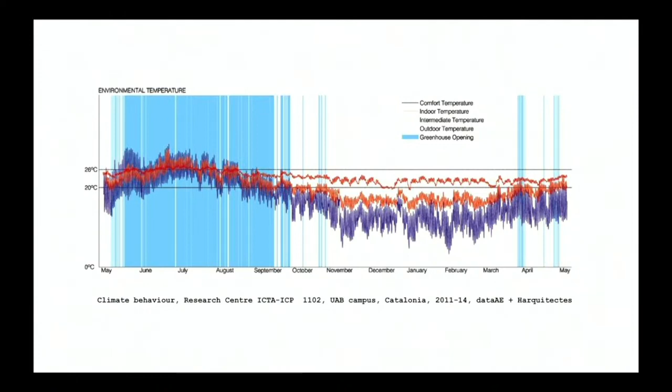The first is these two black lines, describing the legal comfort range, between 20-26 or 21-27 depending on the regulation. The other lines moving up and down are important too. The blue one is the outside temperature, going up in summer and down in winter as usual.

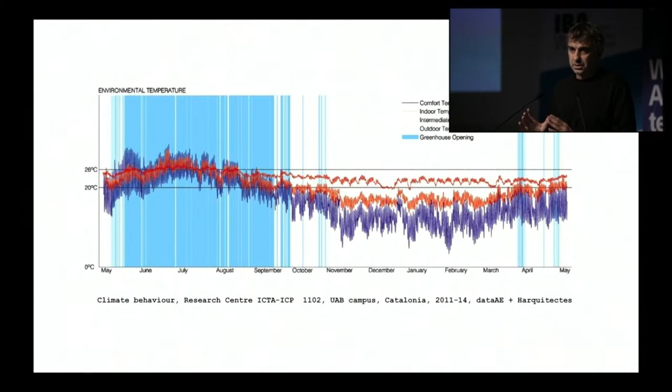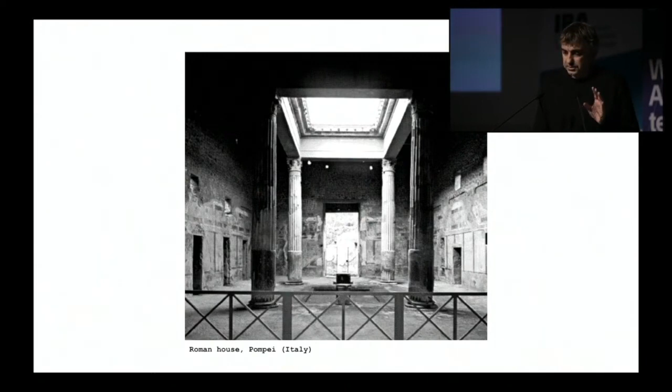It expresses the status of the family that lives there. They also use decorative elements. So it's again about the space, the meaning of space, and the feeling in a space. We really love to create climate comfort, but I think architecture is not only about that. So it's not enough.

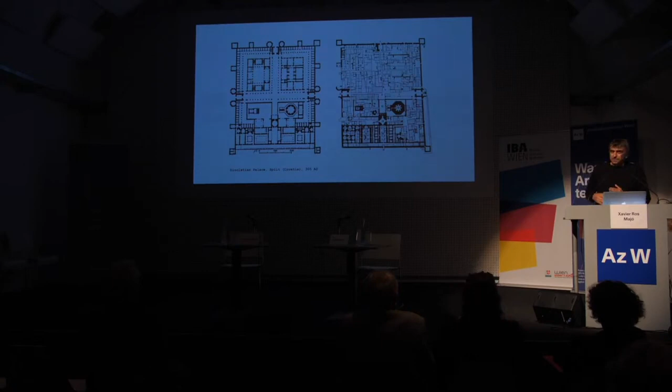Today I visited the Basquiat exhibition in Albertina's museum. Super amazing, and I realized that you can look at one of the paintings, and if you go close, you can imagine what happened during the painting—different layers, some scratches, and a lot of layers involved in the short history of the production of this painting.

I think that in architecture, this could be described in this picture of the Diocletian Palace of Split. There is a starting point—powerful, amazing, very precise in terms of style, kind of building, very homogenic in a way. And then what happened to this palace during centuries?

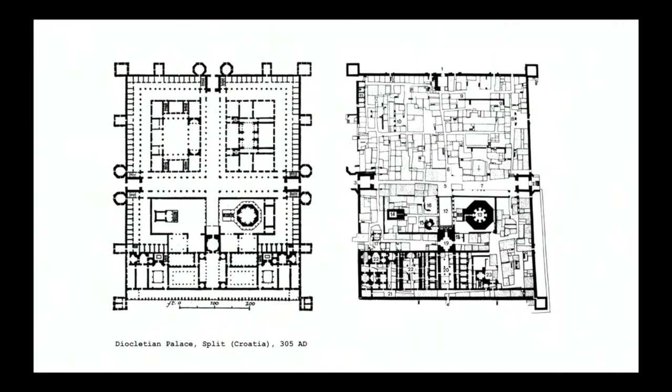Again, it's interesting in terms of history, because to know things is interesting, but not very important, because if you go there nowadays you see these streets, the new buildings that probably have been done using the stones of the demolitions of the original buildings. We don't know why, but some of them are kept and arrive to our days. So it's a kind of collage, this kind of palimpsesto with very different layers, where all of the layers are creating a very specific soul.

Of course, I think the starting point is very relevant, so nothing can be understood or felt without this first step. But after all, it's the mixture of different layers, different constructions, very casual situations that arise and create, in a way, a new thing where all the things that happen, all the centuries, all the scars of the story are kept there, giving a very specific soul to this center of Split.

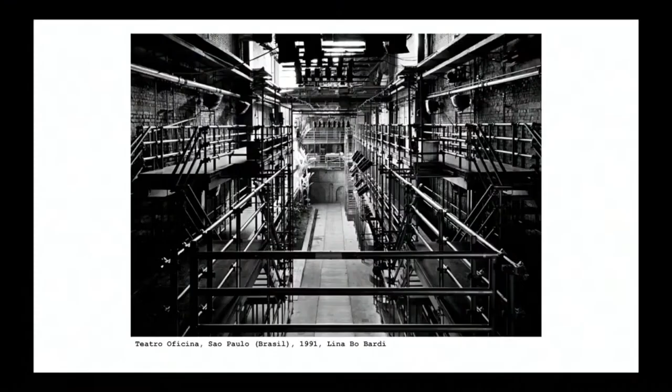And not in a casual way, like the Diocletian Palace, but to work in a pre-existing building—it doesn't matter if it's a heritage building or not. I think sometimes it's interesting to be valiant, it's not a holy thing. So sometimes you need to demolish, to transform, to add. Do whatever is necessary to transform, in this case, burned offices into a new theater, adding this greenhouse facade, the scaffolding, and technical things.

Almost everything is new, but the presence of the old parts—in fact, just the party walls—is essential to understand what is happening there in terms of architecture. It's also interesting, not only this idea of new and old creating actually a new thing, but to understand that a theater, which historically has been an archetype repeated with some variations but with a long life, can be transformed.

Thanks to the architect, in this case Lina Bo Bardi, who understood or imagined that a theater can work as a kind of long street, and it doesn't matter if it's narrow or tall, because the theater that happens there would be shaped by the limits of the architecture in a way. I think this idea of the architect redefining how a theater play could happen is something that's also interesting for us.

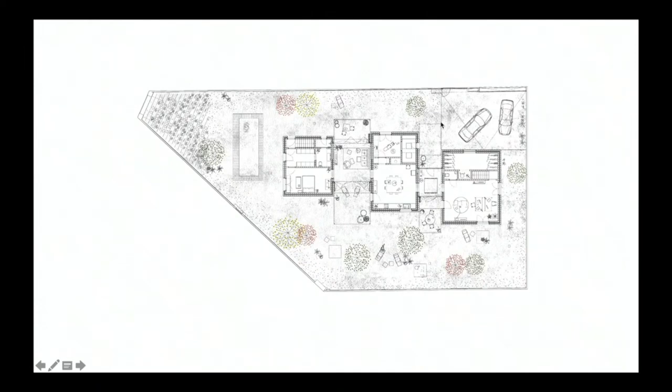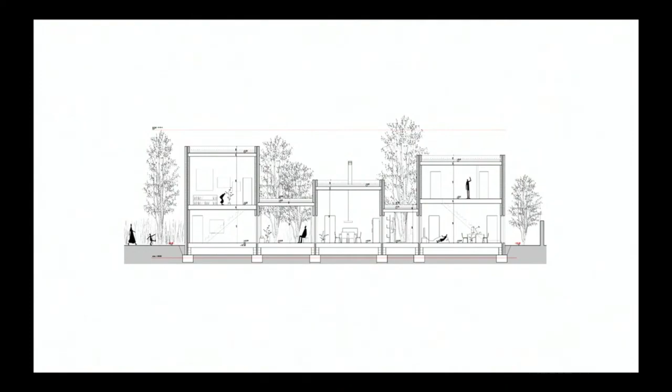You can understand here how simple it is. So the 3 boxes and the 2 galleries or porches connecting the 2 gardens, using a very basic system, load-bearing walls, double walls, because there are no buttresses, so we need them working together thanks to a very basic steel connection, you will see later, and that's all. So it's a very typical system, as you can see here.

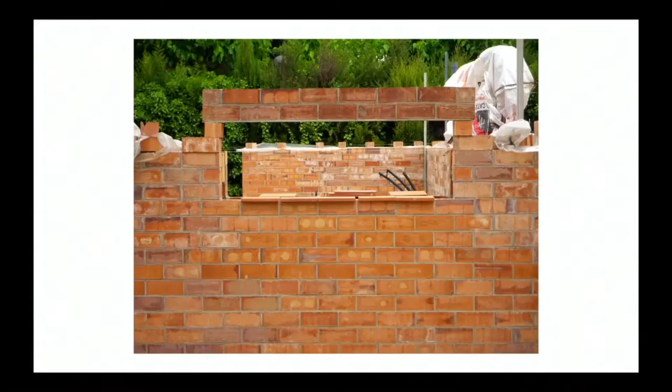These are the connectors, so both of them are load-bearing walls working together. During the construction, we improve everything thanks to the workers. In this case, we changed the design of the lintels because a worker proposed a solution and we loved it, tested it a little bit, and it worked.

The brick is the more basic one, used for structural walls, but in general covered by mortar or different layers, not in this case. And this is the house after completion. You can understand very fast this huge connection and the two boxes, just one window for the kitchen and another for the studio on top.

If you compare this picture just after completion and this one after 3 or 4 years, you can see how the vegetation has grown up. We love the vegetation because it expresses the idea of the passing of time, and it improves not only the aspect of the building, but also the climate comfort. In summer we have foliage on top, and in winter the foliage falls down and the sun goes inside very deep into the house.

In this case we decided to keep the same kind of walls without painting in the galleries, expressing this outdoor condition, this space in between. As you can see here, showing all the basic systems of construction, having a lot of inertia. Inertia is very good in Barcelona. And then inside the boxes, the same structure, the same walls painted white, with just one or two windows per space. And the kitchen, which is very high.

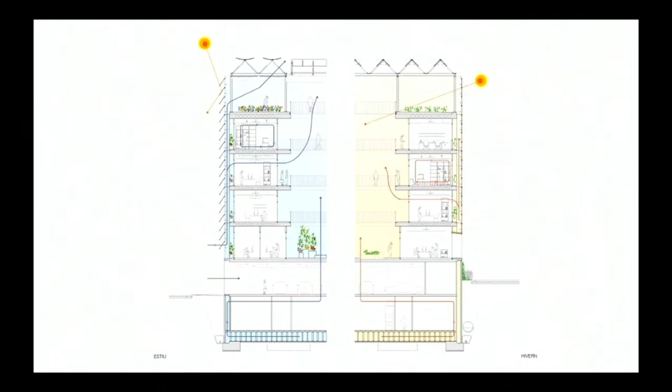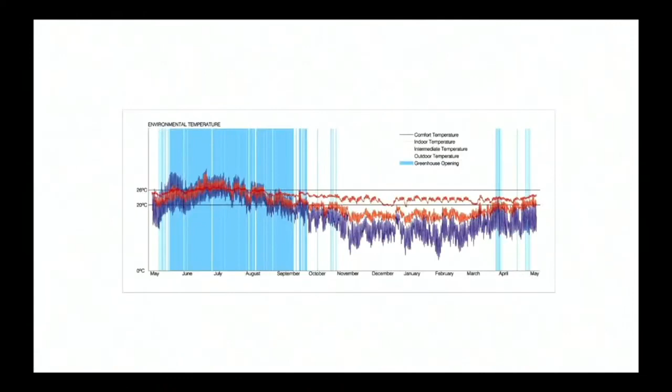The building is very simple, so we have a heavy structure, post-stressed concrete framework with these columns. We have 4 atriums, vertical patios that connect all the levels and of course work as a kind of chimney. We have these rows of offices made of wood. And then all these spaces that are made for working in a less formal way are scattered throughout the building. Then we have the skin with these

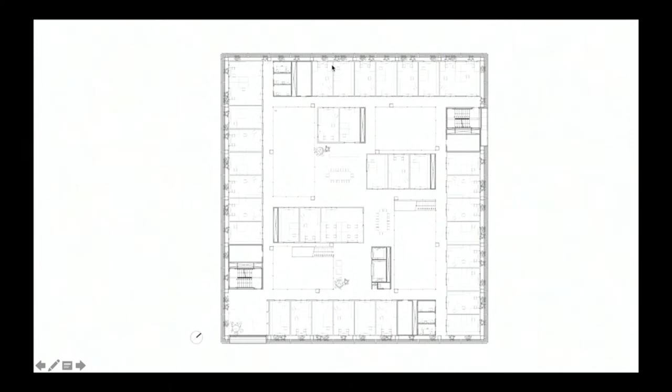polycarbonate windows that can be open or closed. And the thing is that the building works, as I said, as an organism, because in winter it's closed and in summer it's super open. So we have a lot of air crossing the building, and it works very well.

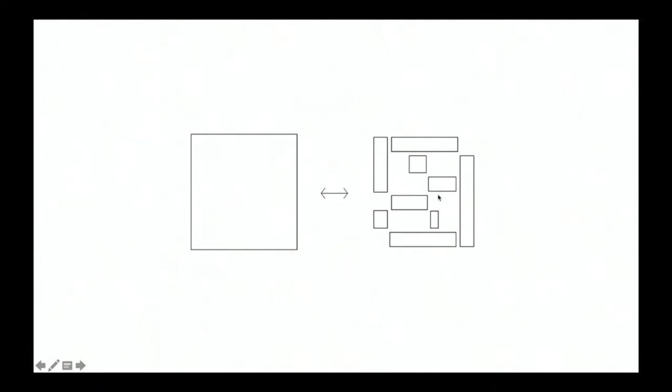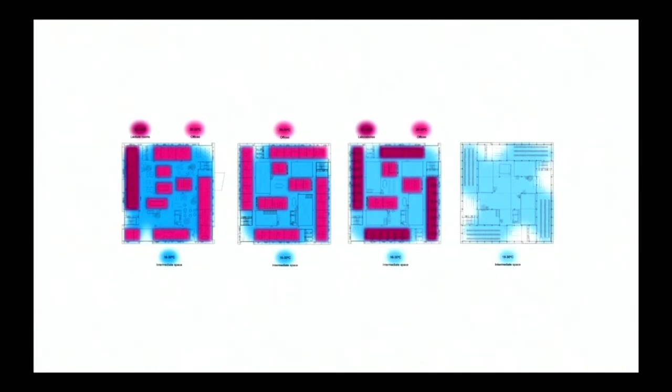You can see here in blue everything that is not artificially climatized. So almost all of the building is done with this strategy, and the rest, in pink, is for the offices and the laboratories, which have a high standard of comfort level, so it's a closed system. The rest of the building is interchanging always.

And again, in this case, this is the space where the ambition in terms of climate is low. So you need to wear shorts in summer and more layers in winter, but it's the only way.

So it's controlled by a computer system. Of course, the user can decide if he wants to open the window, but if he gets out and the window is open and the system decided it must be closed, it gets closed. So it's a mixture.

And yeah, it's very complex, the building, but the slab, we make it lighter using these pipes where the air crosses the whole building. So when the air is cold, it refreshes, and when the air is warm, it dissipates the energy thanks to the concrete mass. So it works very well.

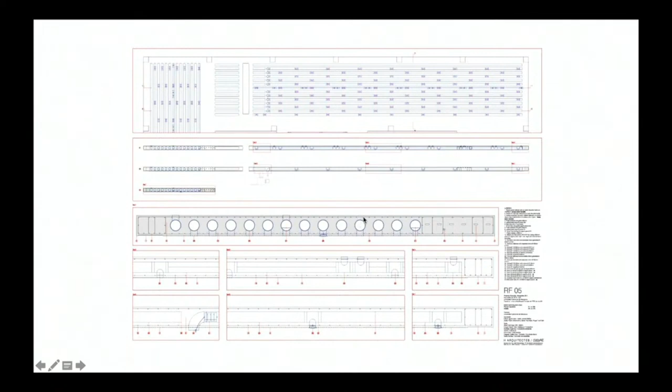And we have a refreshing pipe system on the bottom, and then with the pavement, we have a layer of pipes to get warm. And this is the construction. So it's very complex and beautiful, the picture.

But to reduce this half part means, I think, that year, 100,000 euros, which is a lot. And today the energy, it's very high. This was 7 years ago.

Fluid matter, yeah, as architects we design in general not the fluid matter, but the solid one. But what we decide about the solid affects totally the fluid matter. It means the air, the water, and so on.

So in this case, this is a civic center, or kind of civic center in Barcelona. We create a kind of big tool to improve the temperature. So the whole building, it's a tool to create comfort in a natural way.

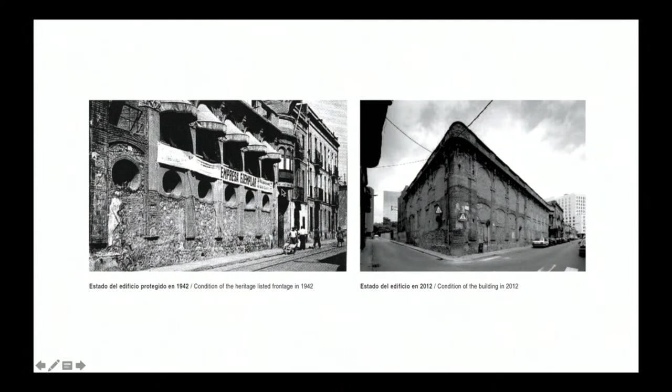This was a former, a big glasswork factory from Barcelona, close to Diagonal. But they demolished almost everything, and nowadays, when we won the competition, I think that the factory was very, very big.

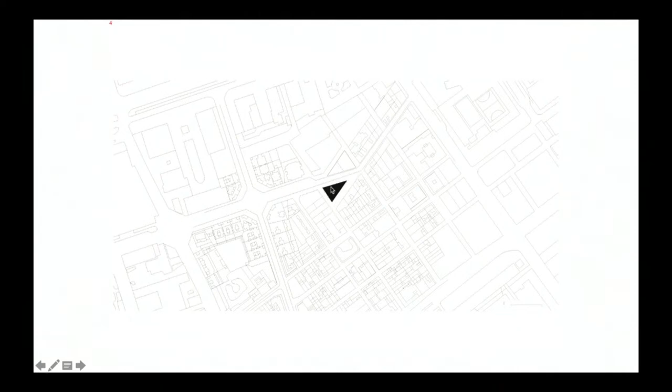But what arrived to our days is just this triangle, and not the triangle, but the single facade, this L. And the rest is just the structure to support the facade, and that's all. So we had to demolish all the structure and keep the facade, because it was a heritage facade.

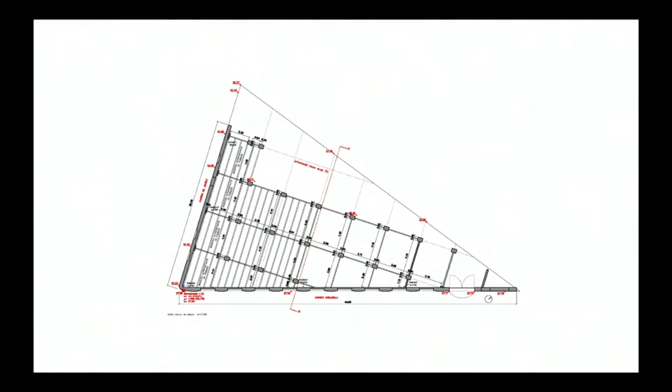So we had kind of conflicts with the patrimonial and heritage people, because, well, it's not an excuse, but sometimes you need to convince people that are not easy to convince.

Now the thing is that we started the project with these big walls that we have here, and we implemented the same kind of walls to the whole building to create a new structure. The geometry is very strange.

It's a triangle, and we decided to put a kind of greenhouse in the sunny facade, and then the classrooms facing this greenhouse, and then you will see with these big gaps on the wall that there's a connection with the chimneys, and then a corridor, and then the small program where the triangle gets smaller. And then another atrium, a very vertical one, that is the entrance. So using load-bearing walls and massive concrete slabs to have inertia.

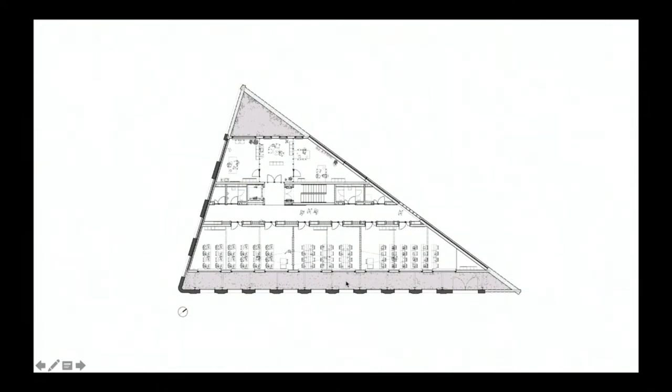So you can see here one of these classrooms during the construction. So we have this window here connected to the greenhouse, and these gaps on the wall connected to the chimneys. So the air crosses from the greenhouse to the gap and goes up.

Thanks to the chimneys. So it's a very risky project, because we decided to renovate the maximum times per hour. It means 11 times per hour, which is the maximum, using only a natural system. And in fact, using the sun during the summer, which is the enemy in Barcelona.

These chimneys on the top create a very specific landscape in the city, but they are tools that remove the air very fast. The air crosses the classroom, goes up through these pipes, and in the base of these pyramid-shaped chimneys, the temperature gets very high, 70 to 90 degrees. That difference of temperature creates the movement.

And it happens because of the sun. The geometry of the pyramids is the best to get more sunrays during the whole day. So it's not about aesthetics—it has an aesthetic consequence, but it's a very scientific design in a way.

It's important to remove the air during the day, and we have an extra tool to refresh, which is the pavement. We have pipes with fresh water, but not much, for if necessary, and also in winter.

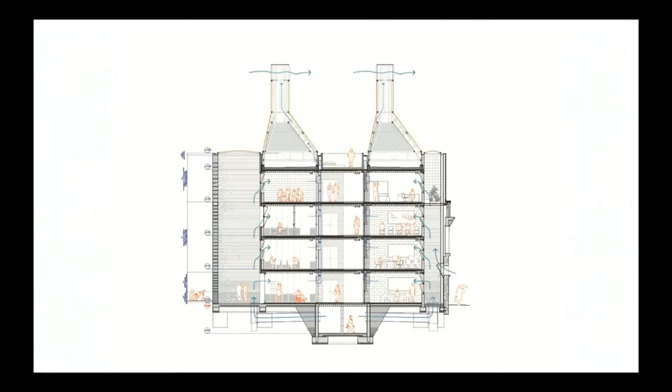What is important here in Barcelona is not to remove the air during the day, because the temperature is so high. It's to remove the air during the night, because at night it goes down enough to refresh the whole building. Refreshing the mass is the secret—using inertia to create comfort.

So the chimneys work also during the night with a very basic system you will know—the Venturi effect. Thanks to the changes in size of the gaps, the air goes faster and is removed, sucking the air from the bottom. It's very simple—that's the strategy.

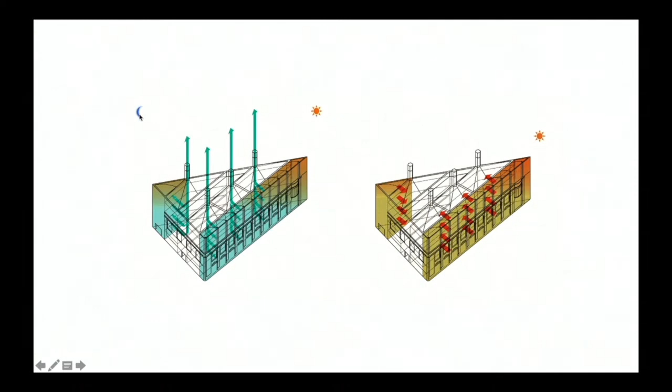In winter, everything is closed, just to renovate the air. We circulate it maybe once per hour, depending on the people in the classroom. In summer, it's always open during the day and also during the night—same strategy.

We manage these schemes and simulations using engineering software. We don't know how to use it, but we make all the decisions. We put options on the table, they study and improve them, we discuss—we're at the same table and level, but we make decisions because it's architecture and we are architects.

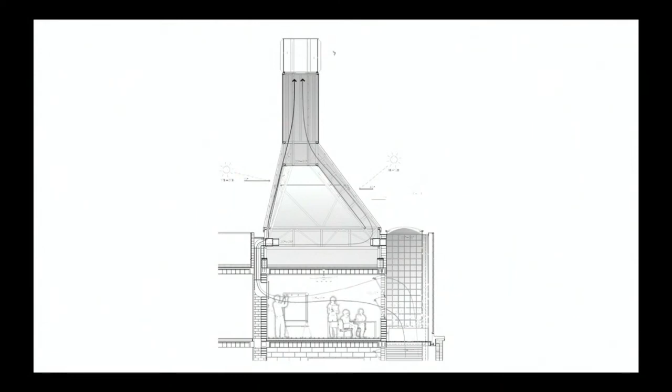We do this kind of drawings for El Croquis magazine where we express, or try to express, everything related to architecture—space, structure, proportions, air flowing, temperature, everything—but focusing mainly on the people, because people are our target.

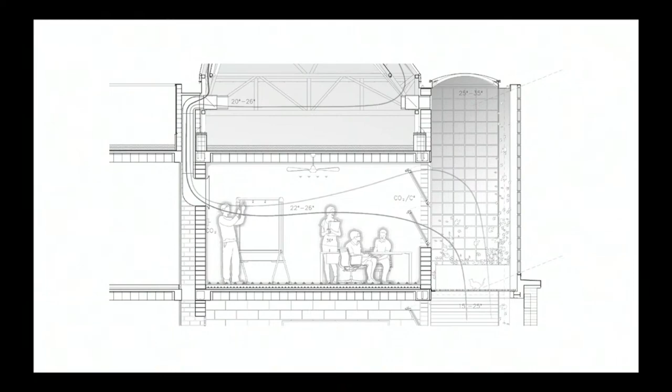Architecture is not an excuse, because it's more than that—everything is decided around the experience of the people, and experience means all: space experience, skin experience, feeling, temperature. So we actually believe in a kind of global atmosphere where everything is involved.

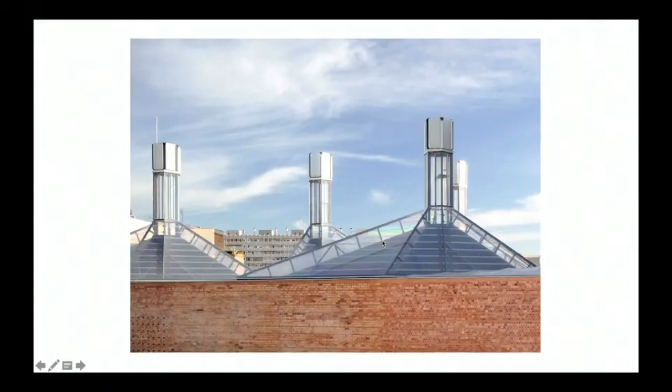As I said, we have a heritage facade here, and we increase the height of the building and the chimneys. For us it's important that we started from an old facade and created a new one using the old, so everything is new here. You cannot understand what is happening without feeling the important things of the old part, but they are working together in all ways.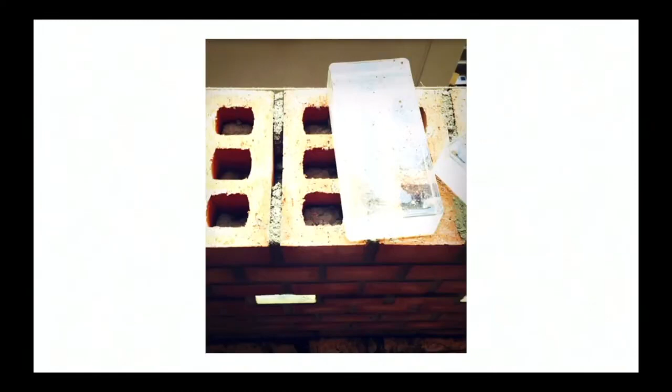This is the entrance—you can see these black dots that are white dots inside because they are made of glass. It's a kind of remembrance of the glass factory. Sometimes we are sensible, but not much—it was the case here; we have feelings.

I told you something about using Lina Bo Bardi's Teatro Oficina—it's important for us, this idea. For us, working with heritage or non-heritage buildings, just a pre-existence, is always an opportunity to transform, because we need to give new life to the building, so we need to be valiant to make good decisions.

This is also a civic center in Sants, Barcelona. This is what we found there—it was a former cooperative from the start of the last century, 1928, I mean.

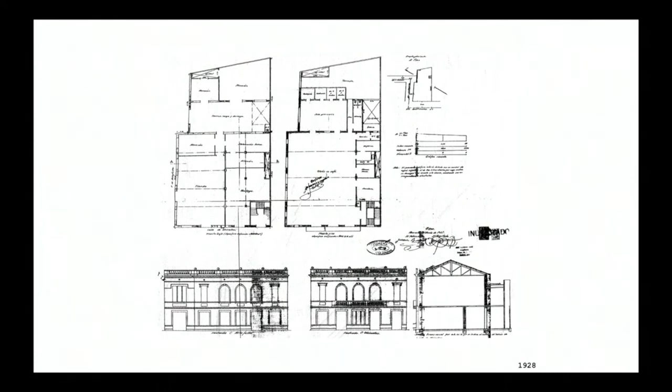We arrived there in 2012, I guess. The building was divided in 3 parts: the main, more public one, and these two rest parts. Our strategy was to create a kind of new street where users can quickly be oriented inside the building to know where to go, because it's a center used by very different people, new users and common users. So it was important to make a clear decision, to create this street thanks to a demolition, a total demolition.

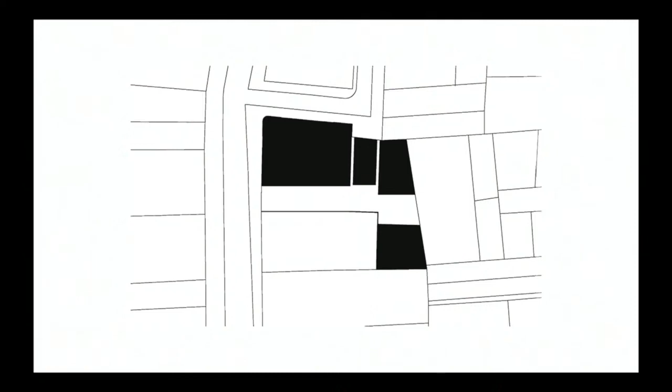You can see here that we proposed this demolition, and we also added a very strategic element inspired by Teatro Oficina of Lina Bo Bardi, kind of a scaffolding, where every person can recognize where to go. The stairs and this kind of passerelles, everything very fast and very easy.

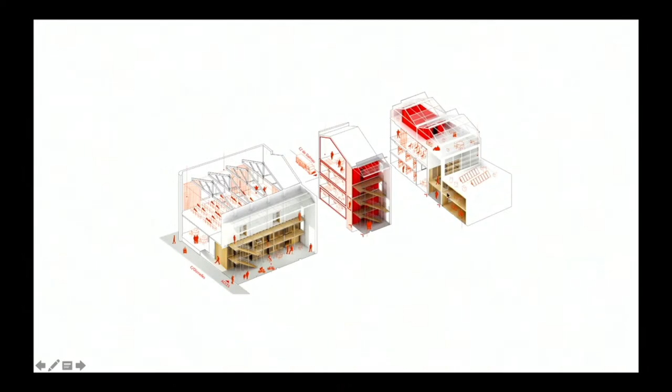Then we have the new theater, the former shop converted into a kind of multi-purpose room, a services area, and a lot of classrooms here on the bottom, the inner part. So it's not very interesting, let's say, the plan of this building, because it's very rare. But it's interesting to understand that in black you can see the original structure, the original walls, better built in the more public area, with worse systems in the rest of the building.

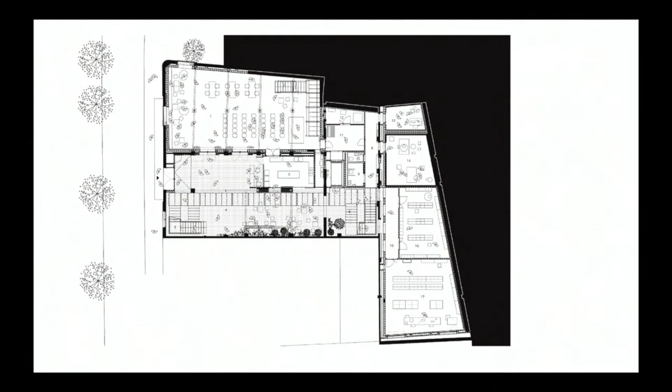So after all, we demolished almost everything in that part, but here we just reinforced the original elements, columns and walls. So everything here is almost old, and everything here is almost new. But also in this part, where the structure is totally new, you can recognize the original elements that create a very special atmosphere effect. You can recognize this street, the different pieces, so not very interesting in terms of plan—this is the main strategy: to transform and recover the theater and the former shop, and demolish the rest.

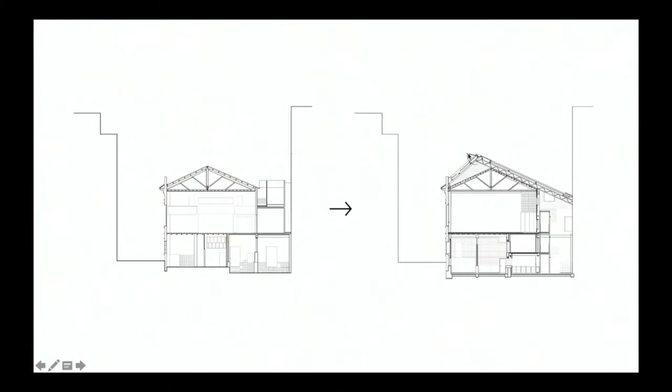As in the Chimneys building, the roof becomes more simple, but still a chimney. So we have an air chamber here, and the air crosses the whole atrium and goes up thanks to this window. You can see here again the original facade and the new things, but working together as a totally new building.

Again, the strategy is the same, trying to understand where we don't need artificial climate. In this case, we need artificial climate in a lot of classrooms and so on, but the air we push inside the classrooms goes outside and is removed in this street. So we improve the temperature here thanks to the artificial systems that we have in the inner parts.

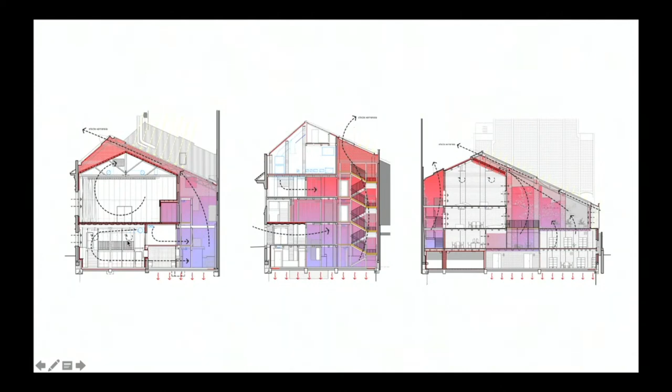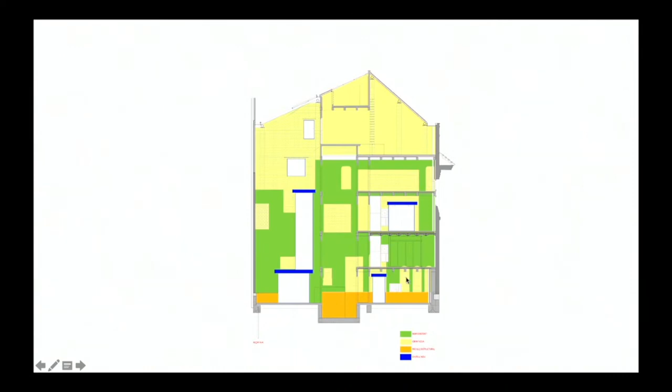If you look at this moment with these three windows, new door, green wall as original, and the new one in yellow, and this plinth that you can see here, the old, the new, the plinth, everything is working to support the slab. It doesn't matter if it's new or old, it's the same, it's a wall, it's a load-bearing wall. This is for a structural strategy, but it creates a very specific aesthetic effect.

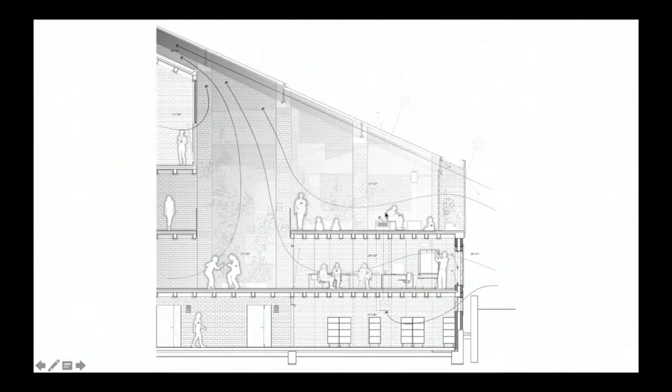This is one of the main spaces of this project, where you can see the drawing, the people, the air, the systems, the temperature, everything described in the picture. The truth is this is the new part, but thanks to these big gaps, it's not possible to understand the building as something new. Trying to keep the spirit of the original building was something important for us.

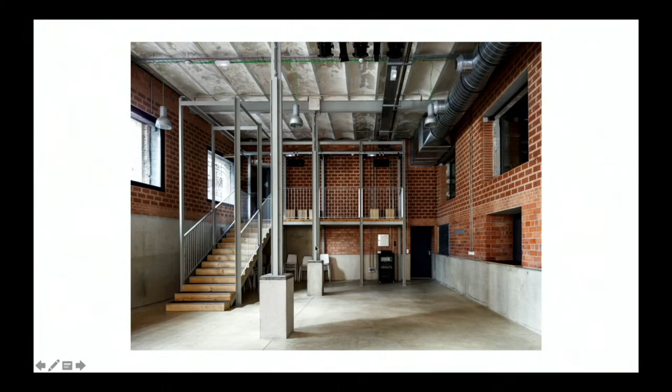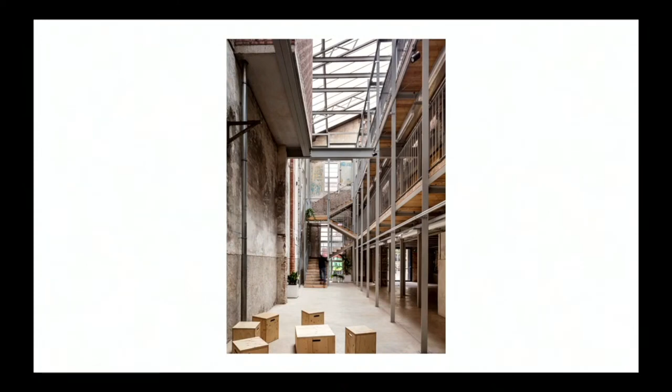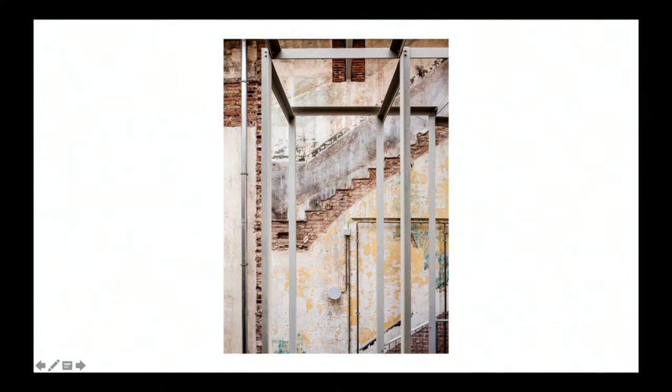This is the atrium. There's the entrance, the original party wall, and the new scaffolding with the passerelles and stairs, so it's very easy to understand how the building is organized. These scars and cracks and all the process of demolition are kept there, creating a very special atmosphere, mixed with new structure, new bricks, and the scaffolding structure of the stairs, and also all the systems for light and so on. So everything is new, but nothing could be understood without the old parts.

I will not explain every brick, but every brick has an explanation, because it's a good way for us to make decisions, to give reasons why we use less height to connect with the irregular skyline of the original wall, why we use the cheapest brick for the structural wall, why we use this U filled with more concrete and steel bars, etc. There's always a reason why we use the size, which is the Catalan size, quite bigger than the Spanish one that we use for the new structure.

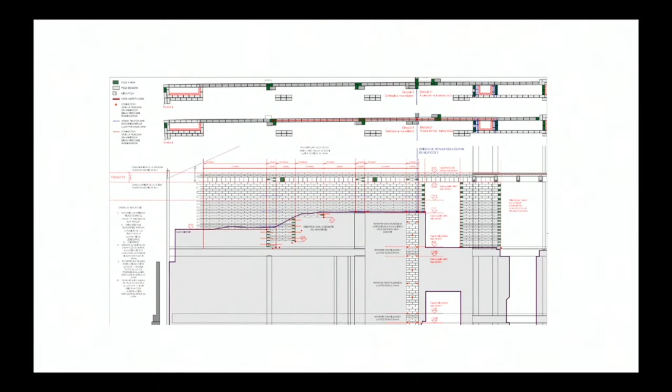So these are the kind of plans that we did for this project. I think we did 250 plans for the project before construction, and 350 more plans during the construction.

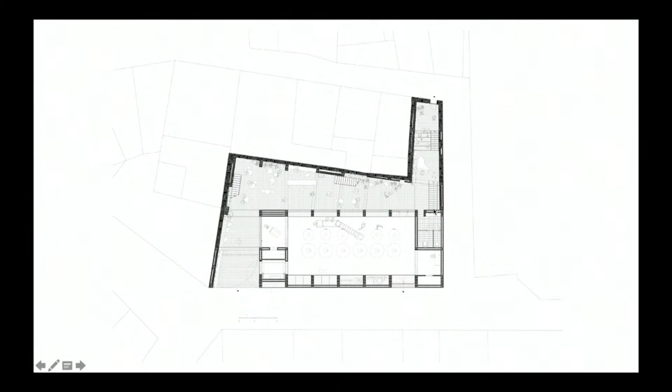Very fast, because I decided to keep this project since it's a new one - the idea of total space, which I explained a lot about. This idea that everything is involved in the space. In this case, for this project, which is a winery in the south of Catalonia, a very special area called El Priorat, a wine region - the project is very simple. We have the hall to create the wine here, and then there's a kind of street, a corridor surrounding this box, a very specialized box, a kind of cathedral for wine, and that's all.

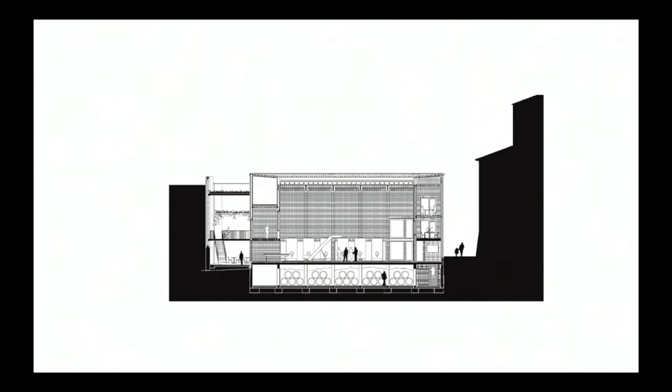So we have the wine production here. We have very high demands in terms of regular temperature, so it's very important to have very little variation of temperature during the year. This is the section for this kind of street where everything is open, just roofed, and that's all. The ambition here was to create this total space, a kind of super height, because the air increases in temperature here and goes up, then is refreshed and goes down thanks to these chambers between the walls.

You will see later a very simple system with more layers in the south with the sun and fewer layers in the north, and it works very well. After two or three years, the temperature is very regular. The tanks have a kind of serpentine to change the temperature artificially, and it's mandatory - there's no other way to make wine.

It was not necessary to have very regular temperature because we have machines, but if you create a good atmosphere, a good temperature, you don't need to use a lot of energy to create artificial temperature in the serpentines that surround the tank.

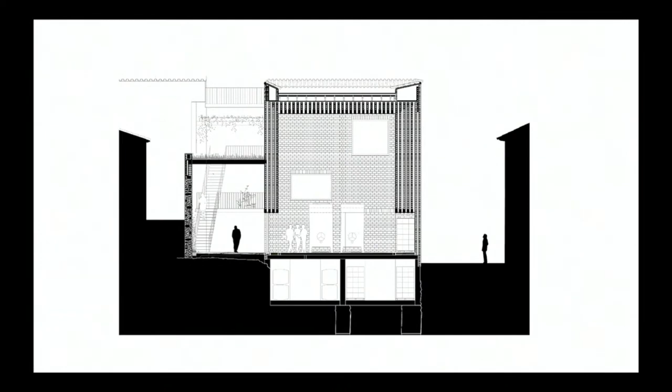It happened, really. The system is very simple, always the same: hot air goes up, and when it's refreshed, it goes down. In this case, using a layer of water - it's a complex system, but easy to understand.

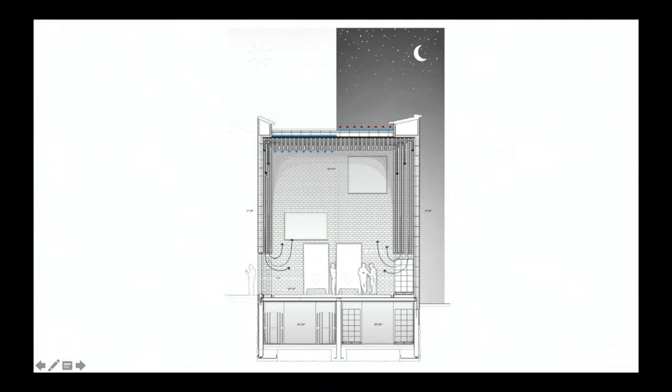We have water during the night on the top, outside, that gets fresh, and we put the water inside during the day. So when the air goes up, it is almost touching the fresh water, and it refreshes more, and it goes down. So the temperature is super good inside.

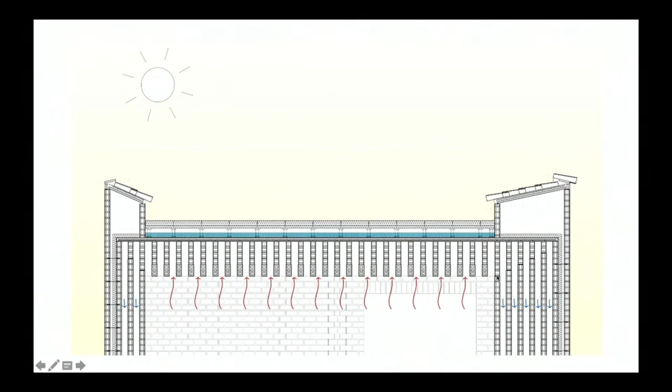I'll focus very fast on these bricks you can see here that are filled with concrete and some steel bars, creating beams made using bricks. This is the system: we put one over each other, the bricks, then we put the steel bars, and then we pour concrete inside, and after that it starts working like a beam.

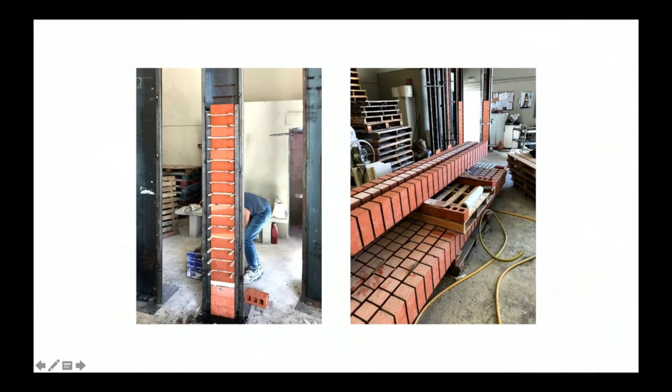We made it in a factory, and then on site we put all of these beams on the ceiling of the hall, always defining the 80 layers that we have in this building of bricks, all of them different. So we drew all of them.

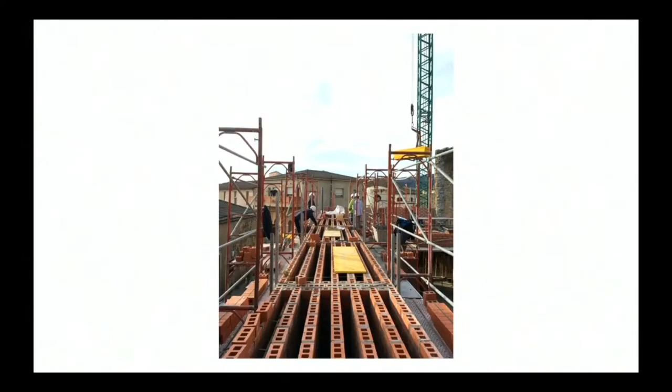So yeah, it's a tool to create comfort, but of course it's a space in itself, so you feel very special when you are there.

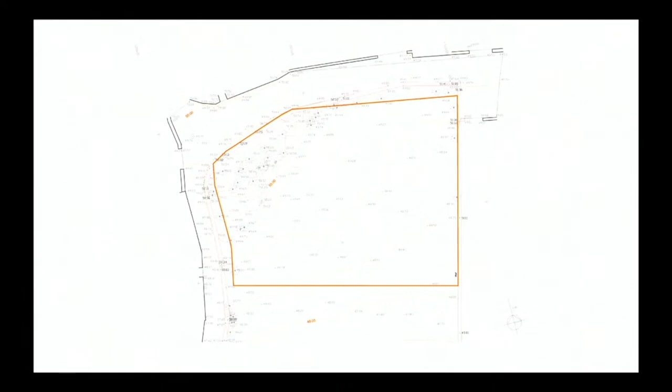So this was a starting point, to demolish the wall. We have a lot of stones there, and the idea was how to create a new wall using today's technology, creating architecture from this, let's say, not the best starting point.

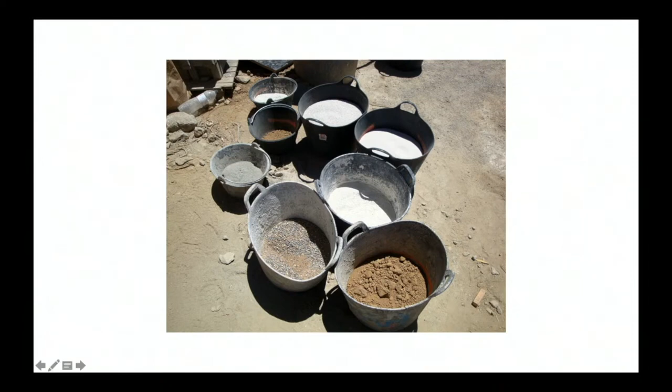So we create a kind of concrete using lime, reducing a lot the cement. We also use, to insulate, something like rice but made of glass with air inside, inflated glass, let's say, to insulate. And we use also the sand of the plot, so we create a very specific mixture of materials, using, of course, the stones from the demolition of the wall.

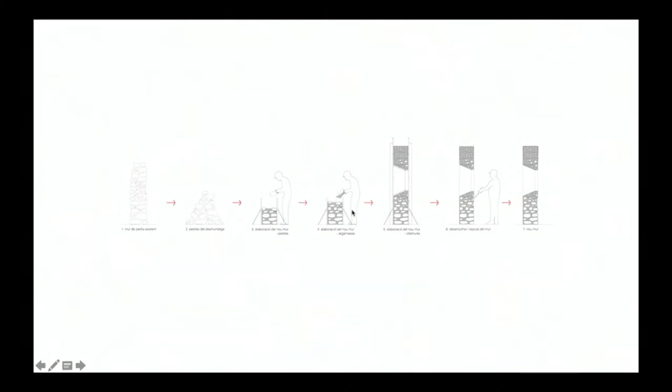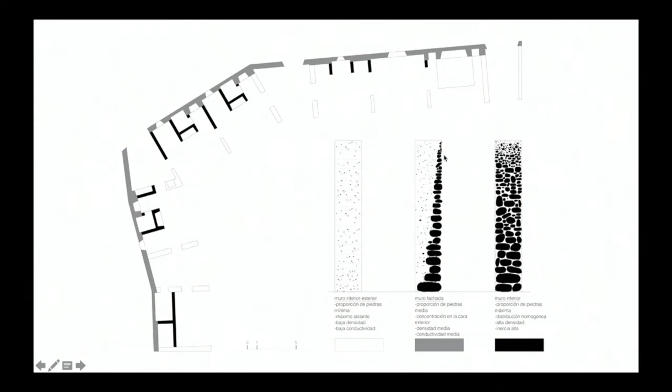And we don't put stones in these walls that are separating inside and outside, because this is a porch, an open porch. After the completion of the wall, we use a bush hammer to recover the stone in a way - you will see. So this is the original wall, and this is the new house.

As I said, the house is like a wall with a structure. For us, it's important to understand that the structure could be the space itself, so everything is structural here, almost.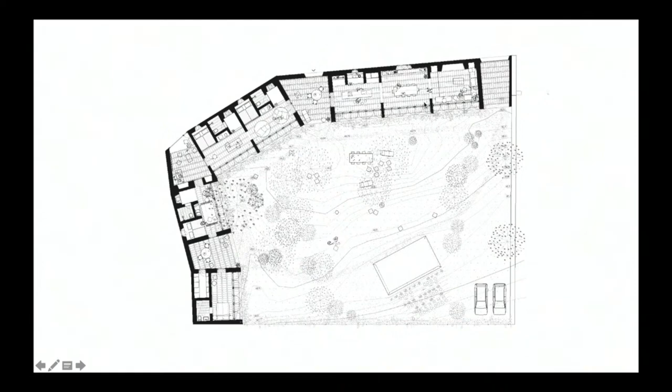So the house is closed to the north because there is a strong cold wind there, the Tramontana, and it's open to the south, to the views and to the garden. So it was very easy in that way. This is the section.

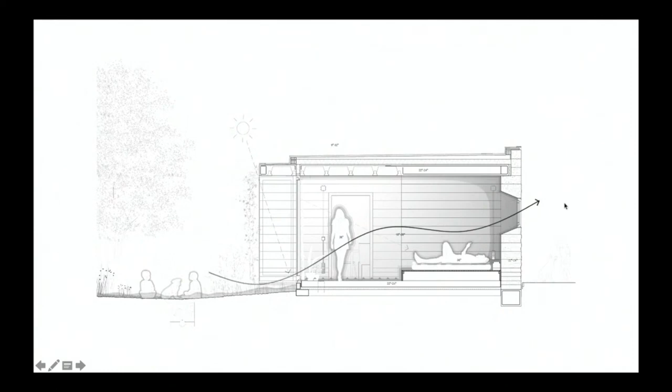Again, it's just to protect from the sun in summer thanks to this eave, very basic. And then we have massive elements here and cross ventilation, just a few gaps on the north to create this ventilation. This is the construction.

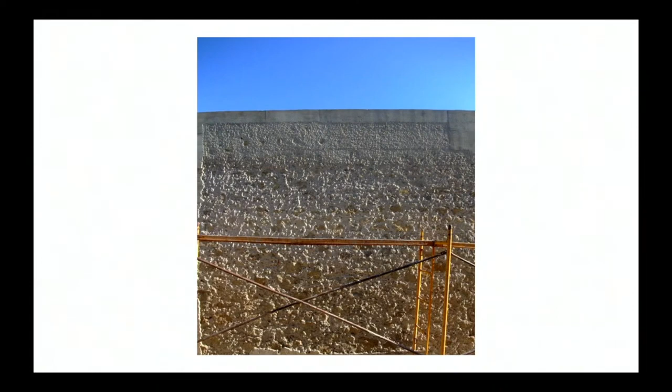And this is what happened after bush hammering the facade. The stones start appearing there in a subtle way, but it has a very good effect. This is the picture, so the truth is that everything is more mixed, not this kind of contrast. But this is the north facade, as you can imagine.

Again, the demolition of this thin layer to show the stones is interrupted here, again expressing the system of construction and giving aesthetics to the facade. And this is the inner facade, very open, the different halls of the house, the spaces that are the structure.

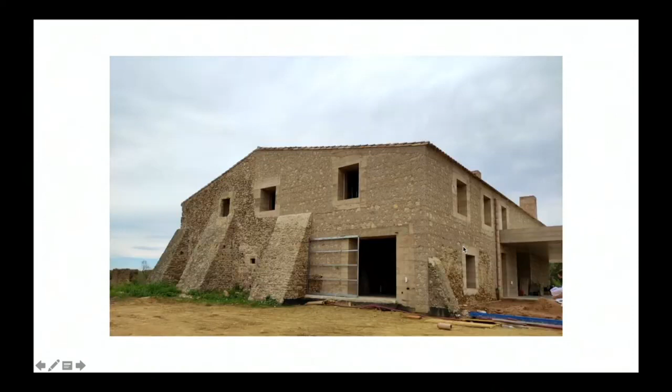And this is an evolution because this is in the same area, but here we use Portland cement, not lime, because we have more height, and we put stones inside because it was a kind of demolished former country house in the same area.

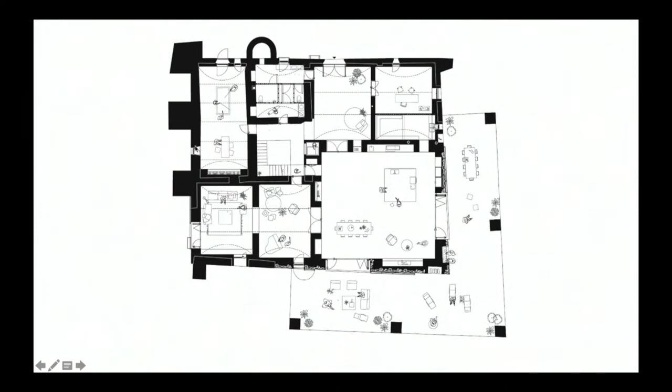So in this case, it's new and old, but using not the same system, but I think that it works very well together. And again, the kind of architecture is related totally to the material and the structure and everything.

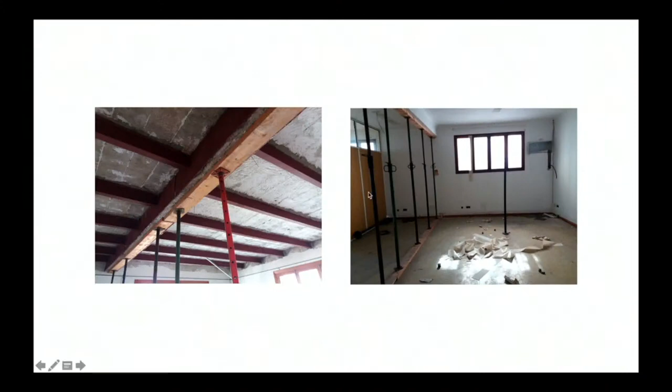And this is the last one, again the same idea. In this case, for social housing in Mallorca, a very small project for 25 apartments for elder people. We have a building there that it was mandatory to demolish. It was a competition, so there was no option. We needed to demolish, it was in a bad situation, so it makes sense to demolish.

But we keep this sandstone from the load-bearing walls. We keep the stones, and as you can see here, we demolish the building, we keep the stones, and we create a kind of big bricks, putting the stones mixed with lime concrete again, but prefabricating all the blocks.

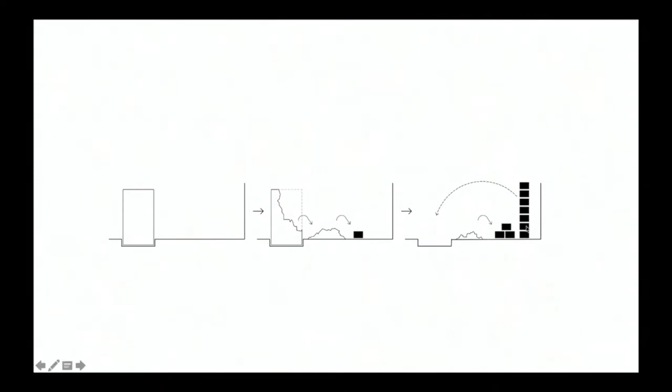This was what the briefing of the competition was expecting, a wooden building to be very fast to build, but this was our proposal, to use these prefabricated big bricks.

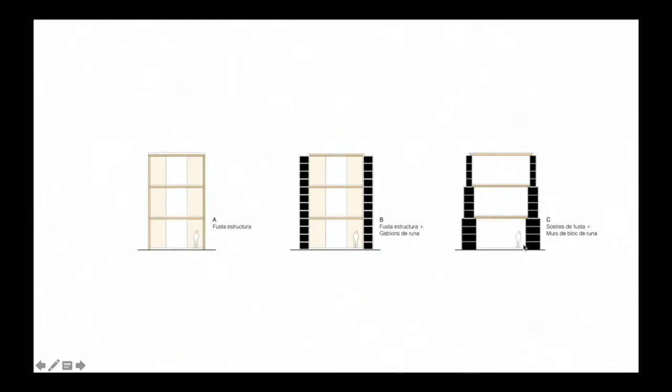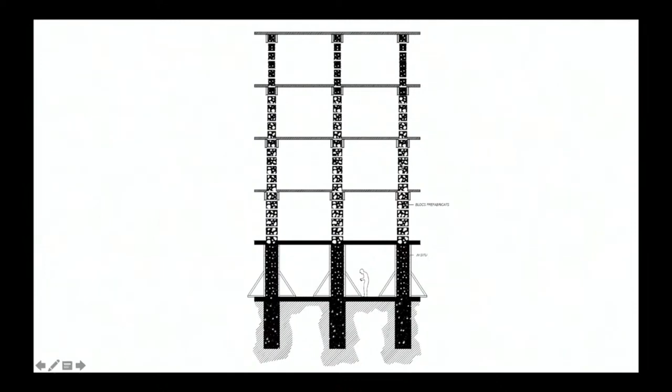So this is almost the last section. You can see here that in each level we reduce the depth of the stones. And again, this decision influenced everything around the project, everything.

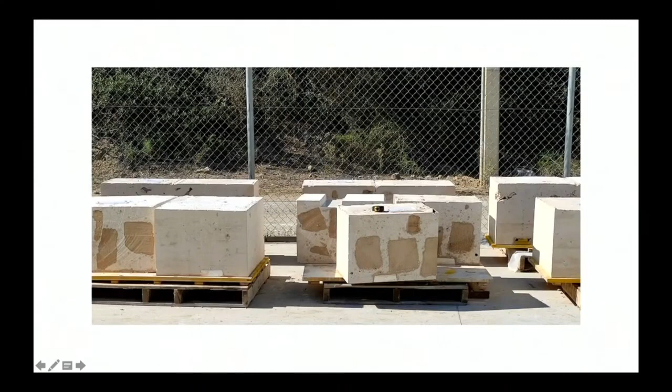And these are kind of tests that we did one year ago. We changed the system because theoretically we started doing a kind of specific plywood frame to pour concrete inside, piece by piece, block by block.

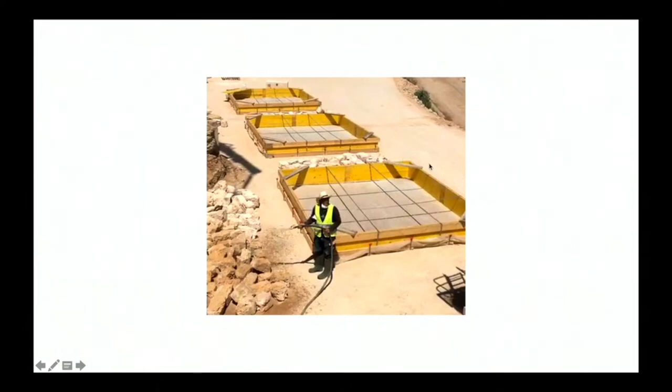But then we had an idea and we create this kind of big pools, 4x4, we put the stones inside, and then we pour concrete, and after that we cut with this big disc saw. Looks very fast, but not very easy.

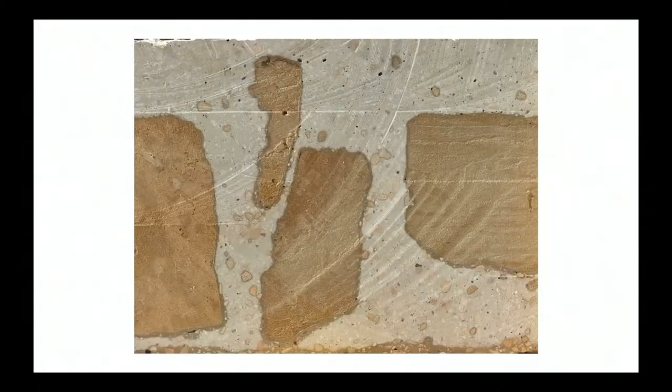Now we start having an amount of very strange blocks, but very beautiful. So again, this is a wet one because you can see the water between the limestone and the lime.

I mean, I said limestone, it's not the word, sandstone. Sorry. And the lime concrete, using the rests of this stone for the sand and the gravel, are from the same material, and you can see here the signs of the disc.

So, and to end, la bona vida in Catalan means something like good life, but in English could be to enjoy, because we are very rational, sometimes sensible, but very rational. We can describe all the buildings in a scientific, climatic, structural, blah blah blah way, but we actually love this idea of good life, of enjoy.

And year after year, twice per year I think, before summer holidays, before Christmas holidays, all the office, we go to visit the works under construction or completed, not a lot because we are a small office, so 2 or 3, depending on the year.

We go there and celebrate, I think, our success, because for us to share this lunch with the owners, the ones that suffered our way of working - we suffered them too, but for us it's amazing. I think that not only do we enjoy architecture, which is our main goal, but we complete the constructions and we disappear in a way. It's not only this idea of enjoying architecture, but this idea of being a team.